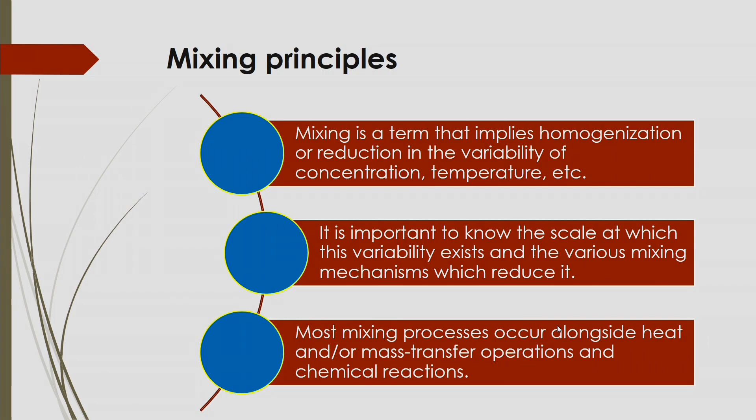So that is why you can say that mixing is one of the important hydrodynamic phenomena in any chemical engineering processes where multi-phase flow systems are taking part in that particular process. Now, in any chemical engineering process, you have to use some reactor where the reactions will be carried out.

So reactor engineering starts with a simple mass balance where your reactions will be carried out. Suppose there is a reaction: what should be the inlet to the reactor, and is there any generation or consumption of the reactants that are allowed to pass into the reactor? The inlet and the generation plus consumption should be balanced by the outlet stream and the accumulation, if there is any in the process.

So here the amount of inlet, and generation plus consumption: is any product generated, or are any reactants consumed? You have to take those terms into account, and also measure the amount of stream coming out, and whether there is any accumulation.

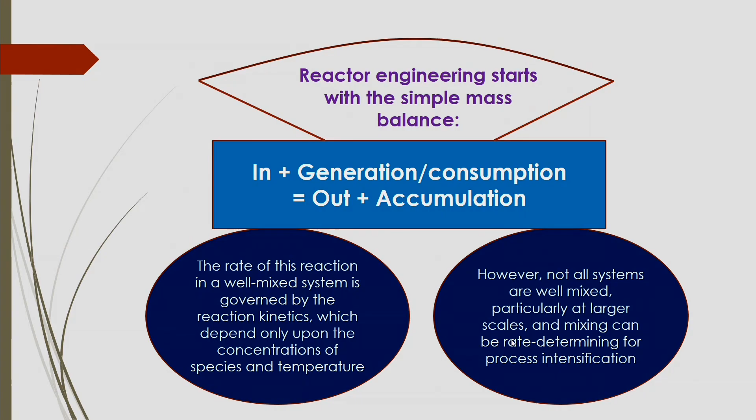If three-dimensional mixing is there, at least in two dimensions you can reduce the back mixing. So you have to design the system in such a way that you can optimize the mixing phenomena. Also, in fluidization operations, gas-solid reactions are there where adsorption is going on at the solid surface.

If you design the system in such a way that there will be back mixing of the solid particles, there may be less performance of the mass transfer from the gaseous stream to the solid stream, because the adsorbent solid particles get back to the original position or circulated, so due to pressure differences desorption as well as adsorption may happen simultaneously. So there may be hindering of the performance of the mass transfer.

Another important task for the designer is the prediction of the degree of mixing and the residence time of the species in the vessel. Certain reactions depend on the residence time of the reactants, so you have to design the system such that for a certain degree of mixing, you can predict or estimate the residence time of the reactants. By generating models you can predict the degree of mixing and residence time, and there are several methods to estimate the degree of mixing, like the tracer technique and other techniques.

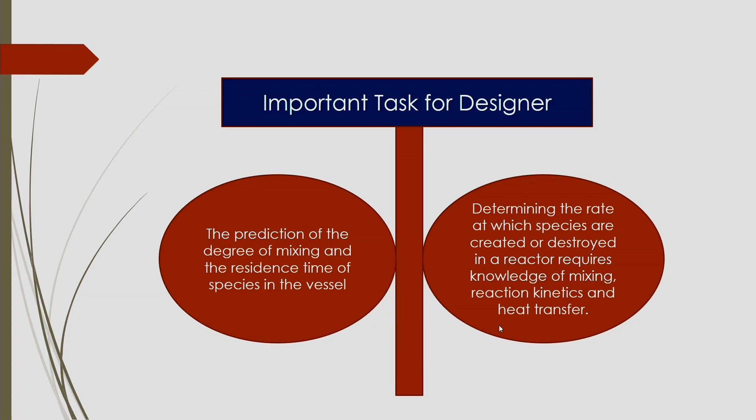This can be calculated based on the degree of mixing. If you have more mixing, you will automatically get a different value of activation energy and the rate constant of reaction. So these are the important criteria for the designer to develop systems based on these mixing characteristics for process intensification.

Designers nowadays are procuring different devices based on these mixing characteristics, and they are trying to reduce the size of the reactor. So reduction in scale is one of the important aspects for process intensification. Now, what happens when the scale is reduced for process intensification?

The reduction in scale implied by intensification has many desirable consequences for chemical engineering operations, like lower mass and heat transfer resistance enabled by the reduction of path lengths of the diffusion or conduction interfaces. So if you make a system such as a micro-channel based reactor, the path lengths may be very small for diffusion or conduction through the interfaces.

So in that case you can get lower mass and heat transfer resistances, so that the performance of the mass transfer operation and heat transfer operation will be enhanced. Also important is coupling with more intense fluid dynamics in active enhancement equipment, where based on mixing phenomena you can intensify the equipment.

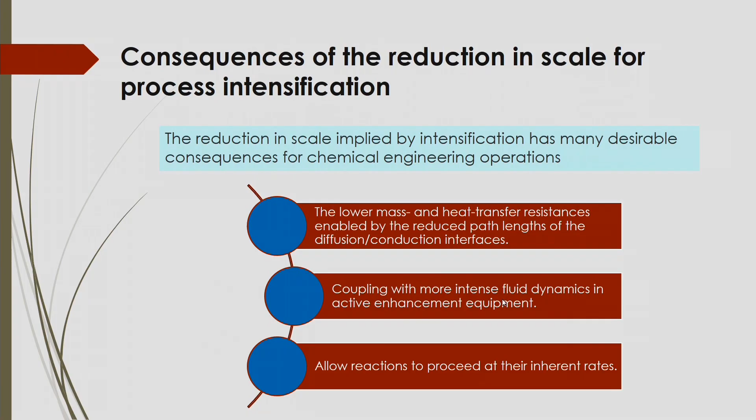Also, sometimes you reduce the scale of the system, such as getting contact of the gas liquid system in micro channel systems where gas and liquid flows occur. You can get more contact, more thin films between gas and liquid.

This gives more reactions at the interface, and you get more reactive mass transfer in the particular chemical engineering process. This can be produced just by the inherent properties to get a more reactive system or mass transfer system by reducing the scale of the unit.

Also, residence time distribution may be substituted for the hour scale processing times associated with large conventional batch operations, which will be beneficial with consequences for energy consumption and process safety.

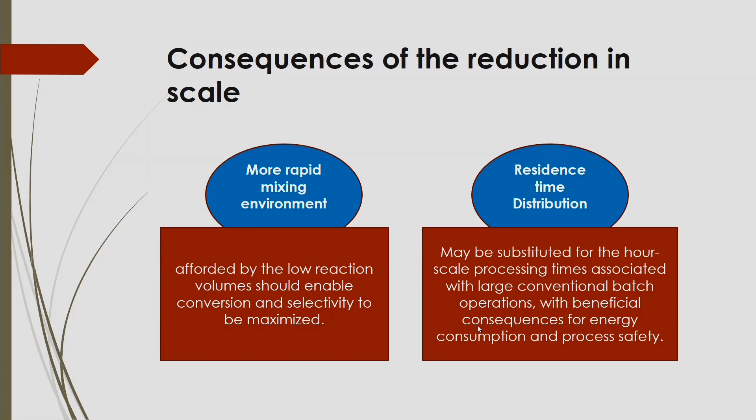Now the main question is why to learn about this mixing phenomena. Basically, understanding of the mixing is desired for the purpose of optimized operation and design of industrial scale reactors.

Also, in many cases there are simultaneously several competitive reactions that occur, and in that case the time scale of the mixing process as well as the degree of mixing are very important factors to give you competitive reaction phenomena and an optimized system to develop that particular reaction system.

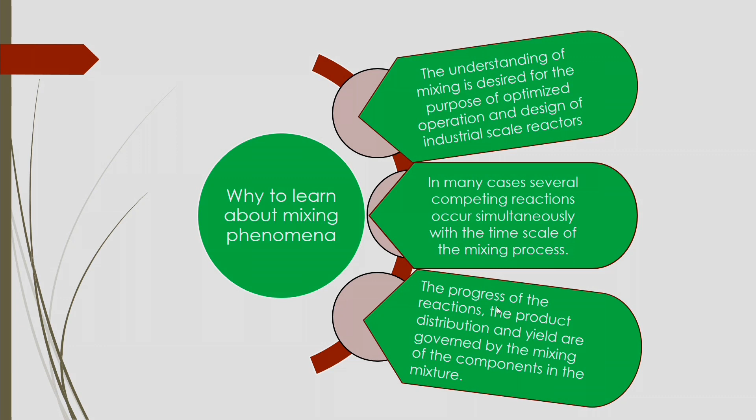The progress of the reactions, the product distribution and yield are governed by the mixing of the components in the mixture - this is a very important aspect where knowledge of mixing is essential, to know how reactions progress and how products are distributed and yield based on this mixing phenomena.

Also, you can control the degree of reactions, extent of reactions, or extent of mass transfer or heat transfer by controlling the rate of mixing. In that case, it is possible to intensify the process to get a better yield.

Generally, mixing time is one of the most important hydrodynamic parameters in different types of chemical engineering reactors for their design and the scale up of the unit and process.

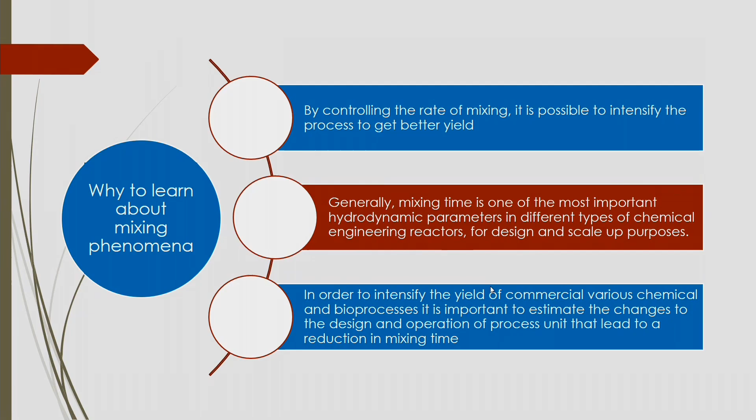To intensify the yield of commercial chemical and bioprocesses, it is important to calculate or estimate the changes to design and operation of the process unit that lead to a reduction in mixing time. You have to design the operating unit in such a way that the yield of the reactions is optimized based on this reduction in mixing time.

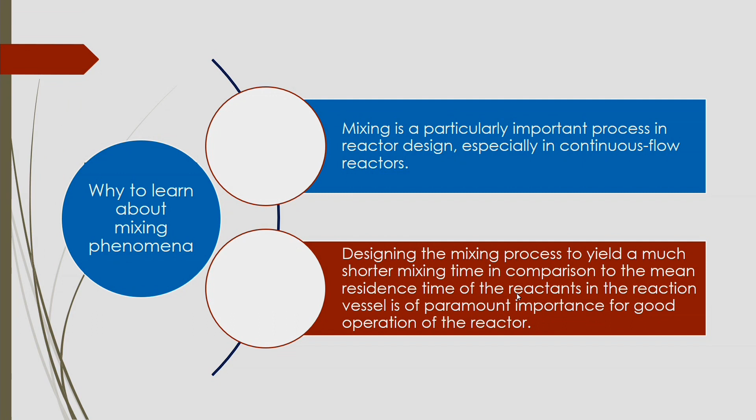Mixing is a particularly important process in reactor design, especially in continuous flow reactors. Designing the mixing process to yield a much shorter mixing time compared to the mean residence time of the reactants in the reaction vessel is of paramount importance for good reactor operation. We need to know the mixing phenomena for reactor design so that reaction kinetics, reactive mass transfer, and heat transfer can be optimized.

Now, what are the factors that affect the mixing time? Generally, there are several variables that affect mixing time or degree of mixing, and we can categorize these variables into four types.

The first type is dynamic variables. Flow rate is called a dynamic variable. If you increase the flow rate, you can get more mixing, and in that case there may be back mixing or internal circulation of the fluid, so you get more residence time of the fluid particles. So dynamic variables like flow rate are one of the important factors.

Then there are geometric variables, such as the size of the reactor being used, and if you're using catalyst particles for a particular reaction, what should be the size of those particles. If you reduce the size of the particles, you get more interfacial area, and then you get more mass transfer.

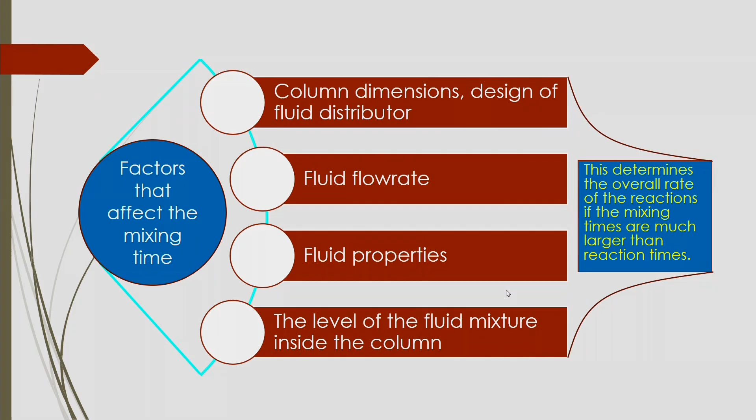Now this determines the overall rate of the reactions. If the mixing times and the degree of mixing are much larger than the reaction times, the overall rate of reaction will be based on these factors that are affecting the mixing time as well as the degree of mixing.

Now, let us consider some phenomena for the slow reactions and the fast reactions. For a very slow chemical reaction, that is relative to the time scale for mixing of the reactants, the extent of reaction is determined by the reaction kinetics and the stoichiometric proportions of the reactants.

And when the reaction is relatively fast, in that case mixing rate, physical factors like sparging design, column diameter, rate of stirring, solvent viscosity, that is different dynamic, geometric, physical property variables, and also some other variables are there. Sometimes thermodynamic variables are also important, pressure and temperature. So those factors will be considered for these fast reactions to optimize the reaction.

And the intense mass transfer and micro mixing capability of the rotating packed bed provides the environment to reduce the reaction time 4 to 10-fold compared to the stirred tank reactors. That is why, for process intensification, micro mixing or micro reactors are being developed, because they give higher mass transfer.

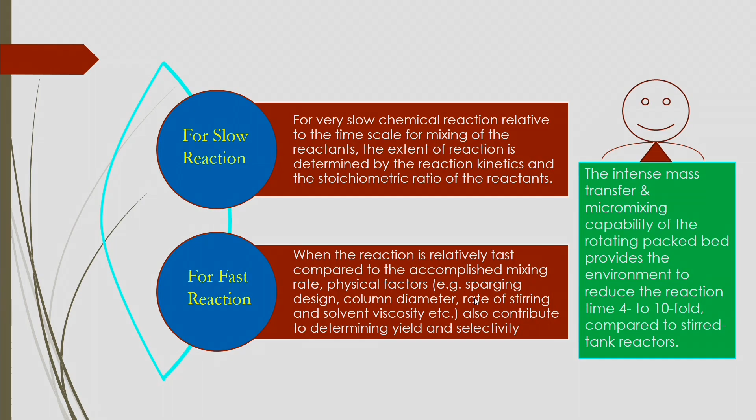Of course, every reactor has some pros and cons. Sometimes stirred tank reactors will be easier to operate, whereas a rotating packed bed may not be easier to operate, and also the investment cost will be higher compared to the stirred tank reactors.

Now you have to remember that in order to exert full control over the progress of a chemical reaction or physical transformation, the fluid dynamic environment must be sufficiently intense so that the mixing and the heat transfer rates are faster than the intrinsic chemical kinetics. So you have to remember this control over the reacting system based on the mixing phenomena.

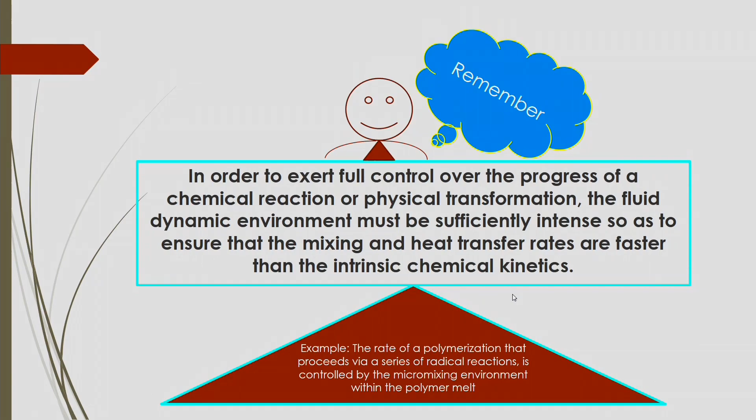For example, the rate of polymerization that happens via a series of radical reactions can be controlled by the micro mixing environment within the polymer melt. So this is one of the important examples where you can control the polymerization reaction based on the micro mixing environment.

Now the influence of mixing and the reaction rates on the reactor behavior, how slow mixing affects the progress of reaction, is represented in this simple diagram. There is a reaction A plus B which gives C, with the reactants A and B traveling in plug flow along a tubular reactor. In this slow mixing there will be interdiffusion between A and B, which is very slow compared to the reaction rate. Then C is produced near the original plane of A and B separation.

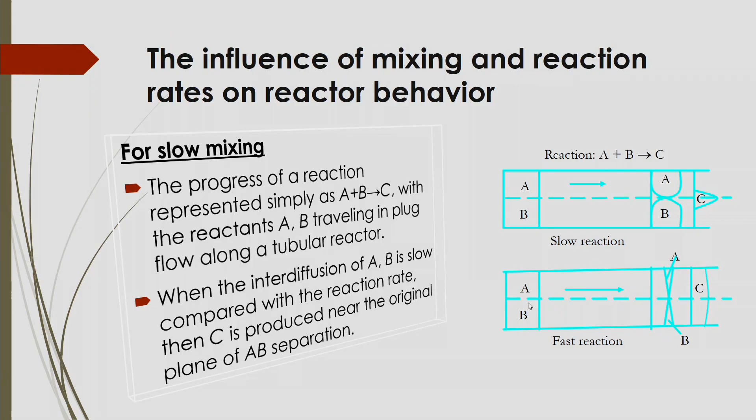So for the slow reactions, the progress of reaction is represented by this A plus B to C reaction, where reactants A and B travel in a plug flow or tubular reactor. So in that case micro channel based reactors for process intensification are important. The interdiffusion of A and B is very slow compared to the reaction rate. And if the mixing is slow, large and varying concentration gradients of the reactant species will exist in different parts of the reactor.

So that is also to be remembered, how you are optimizing the system based on this mixing, whether it is slow or fast. This results in wide variations in the product concentrations and properties that may be deemed off spec in many applications. So you have to remember whether the mixing is slow or fast.

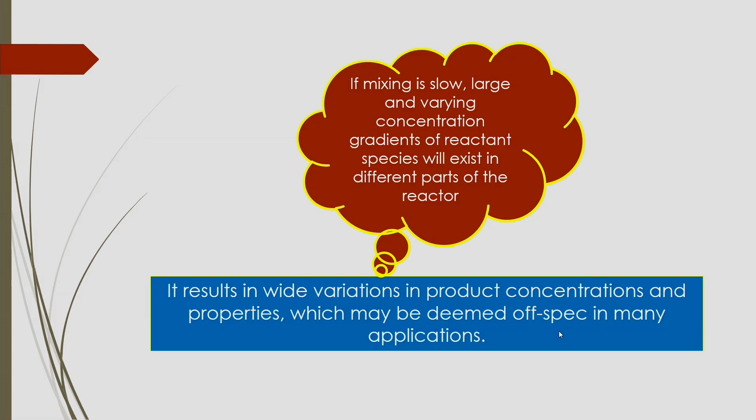According to that, you have to intensify the process and also develop the process unit. And slow mixing represents a total loss of control on two counts. One is that, suppose there is an AB reaction, the AB stoichiometric ratio will vary wildly across the reactor diameter. Therefore, the selectivity for the desired product C is likely to be compromised, because a more realistic reaction scheme will usually include many side reactions.

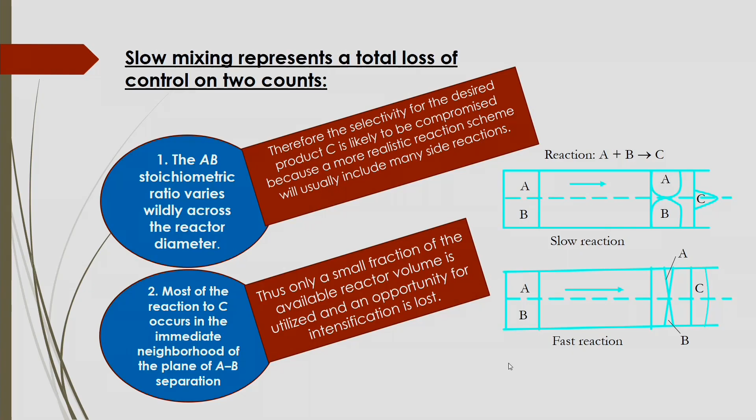Another point is that most of the reaction that gives you C occurs in the immediate neighborhood of the plane of A and B separation, as shown here in the figure. Hence only a small fraction of the available reactor volume will be utilized, and an opportunity for intensification will be lost. So these are the two counts to be remembered for slow mixing, for the total loss of control.

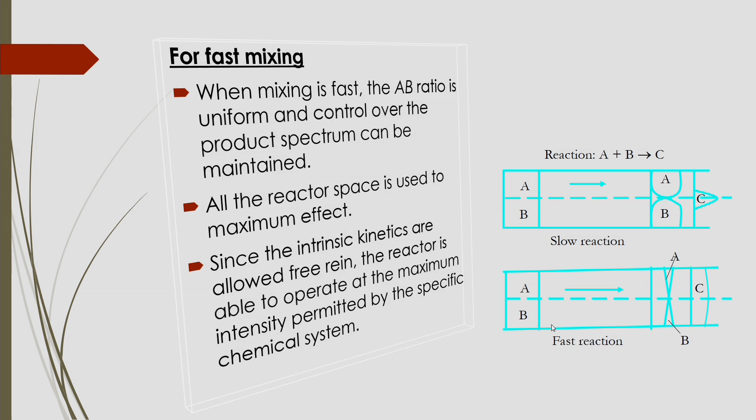For fast mixing, when the mixing is so fast, the AB ratio should be uniform and there should be control over the product spectrum. Also the reactor space should be used to maximize this effect, and intrinsic kinetics should be allowed free rein, where the reactor is able to operate at the maximum intensity permitted by the specific chemical system.

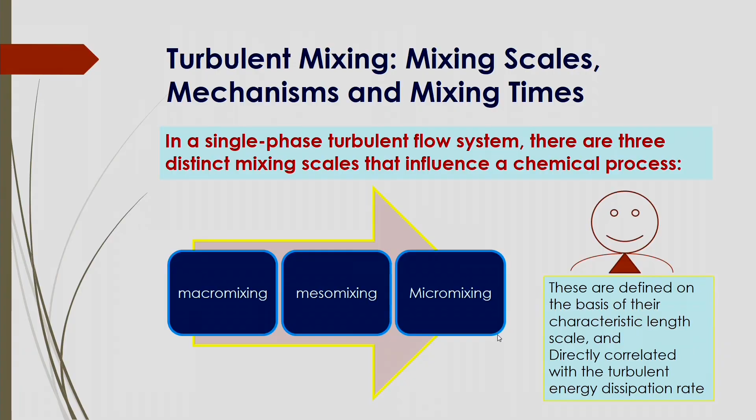Now, let's go to the different mixing mechanisms, like turbulent mixing scales and mixing times. In single phase turbulent flow systems, there are three distinct mixing scales that influence a chemical process: macro mixing, meso mixing and micro mixing. These three mixing scales are generally considered for the intensification of chemical processes. They are defined on the basis of their characteristic length and directly related to the turbulent energy dissipation rate. So, based on the energy dissipation under turbulent conditions, you can optimize the mixing characteristics.

That is why sometimes in a reactor some provisions are made to get intense mixing inside the fluid based on turbulent flow. If you are supplying the inlet streams at a high flow rate, and using provisions like baffles and cross baffles inside the reactor, or nowadays helical coil systems, and inside those helical coils some nozzles that obstruct the flow, then at high flow rate, whenever the fluid goes through these helical or baffle systems, there will be intense shear stress inside the reactor.

Based on that intense shear stress and high energy dissipation inside the reactor, the fluid gets more turbulent, and because of that there will be higher energy distribution and dissipation and more mixing inside the reactor. The path of fluid mixing may also change by providing these baffles, nozzles or obstructions inside the reactor, so that the mixing times may be higher or lower based on the design.

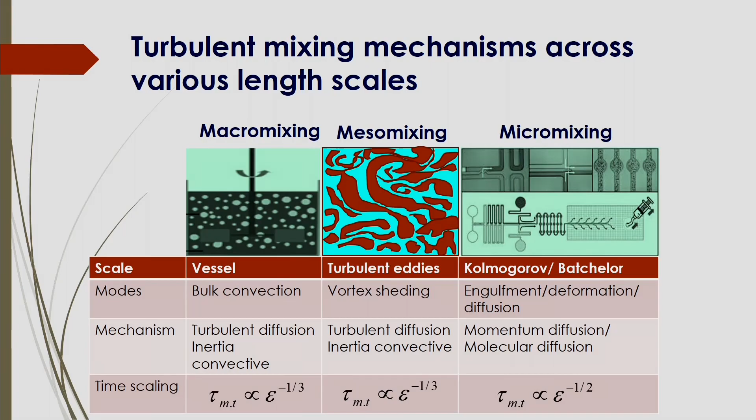And if you consider the time scale, what time will be required for macro mixing? For macro mixing, the degree of mixing will be directly related to the energy dissipation, whereas mixing time will be inversely related to the energy dissipation. If you consider epsilon as energy dissipation, for macro mixing the time of mixing will be proportional to epsilon to the power minus 1/3, whereas for turbulent eddies it will be the same, proportional to the inverse of the cubic root of the energy dissipation. Similarly, for micro mixing, the mixing time is inversely proportional to the square root of the energy dissipation. So based on this, you can see how the time scales of macro, meso and micro mixing depend on energy dissipation.

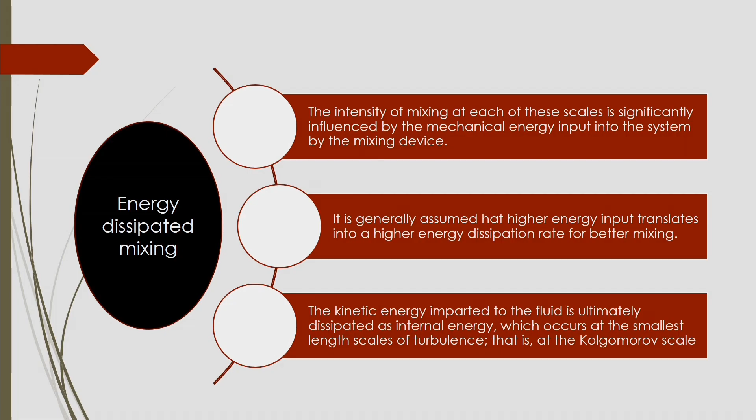Now, energy dissipation and mixing: the intensity of mixing at each of these scales, macro, meso or micro, is significantly influenced by the mechanical energy input into the system by the mixing device, and it is generally assumed that higher energy input translates into a higher energy dissipation rate for better mixing. The kinetic energy imparted to the fluid is ultimately dissipated as internal energy, which occurs at the smallest length scales of turbulence, and that gives the time scale represented by the Kolmogorov time scale.

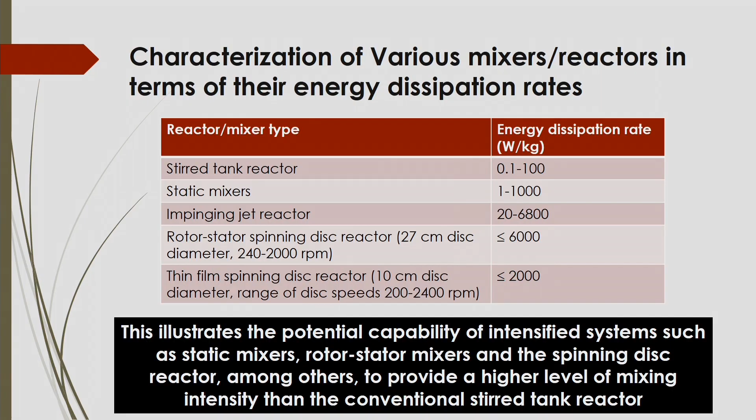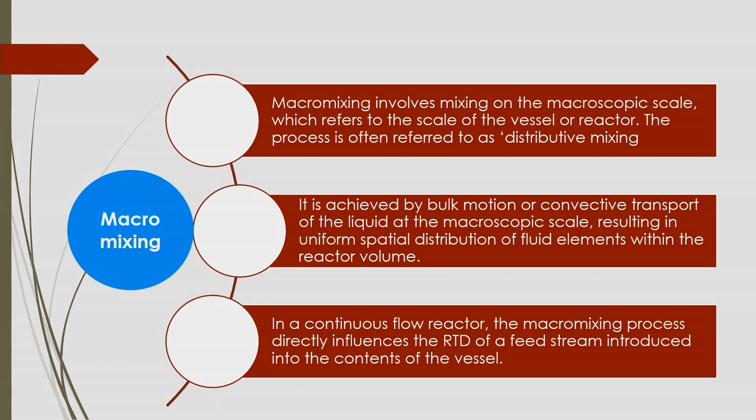Macro mixing involves mixing on the macroscopic scale, which refers to the scale of the vessel or reactor. The process is often referred to as distributive mixing, and it is achieved by bulk motion of the fluid elements transported by the liquid at the macroscopic scale, resulting in uniform spatial distribution of the fluid elements across the reactor volume. In a continuous flow reactor, the macro mixing process directly influences the residence time distribution of the feed stream introduced into the reactor.

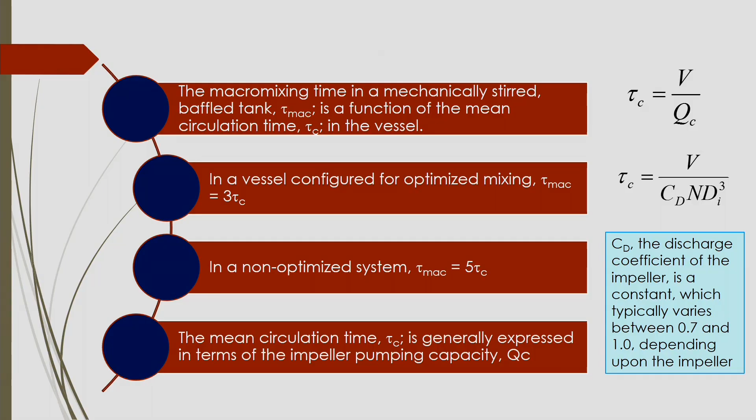CD is the discharge coefficient of the impeller if it is being used for the stirred tank reactor, and it is a constant which typically varies between 0.7 and 1, depending on the impeller design. In non-optimized systems, this macro mixing time should be 5 times that circulation time, and the mean circulation time is generally expressed in terms of the impeller pumping capacity also, denoted by QC here.

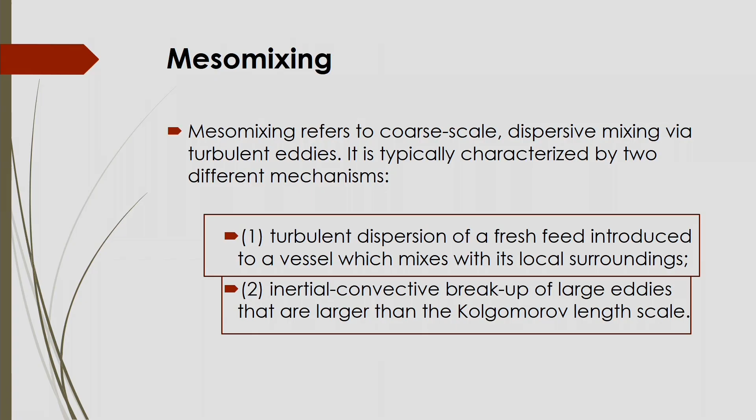Meso mixing refers to coarse scale and dispersive mixing via turbulent eddies; those eddies randomly move inside the reactor, and it is characterized by 2 different mechanisms. One is turbulent dispersion of the fresh feed introduced to a vessel, which mixes with its local surroundings, and the other is inertial convective breakup of the large eddies.

Sometimes you use different provisions so that eddies are broken up into smaller eddies, and then you get a very small scale of interaction of these 2 eddies, and then you can enhance the meso mixing. The characteristic time scale associated with the turbulent dispersion is denoted by the meso mixing dispersion time scale. It is represented by tau d, and it can be defined by QF by UD turbulent.

Here, if R pipe is much less than LD, where LD is the dispersion length, the characteristic length scale of the dispersion, and R is the pipe radius. D turbulent is the dispersion coefficient of the turbulent medium. So tau D will be R square pipe by D turbulent if the radius of the pipe is almost equal to the characteristic length, or if it is greater than the characteristic length, you can define it by this equation here.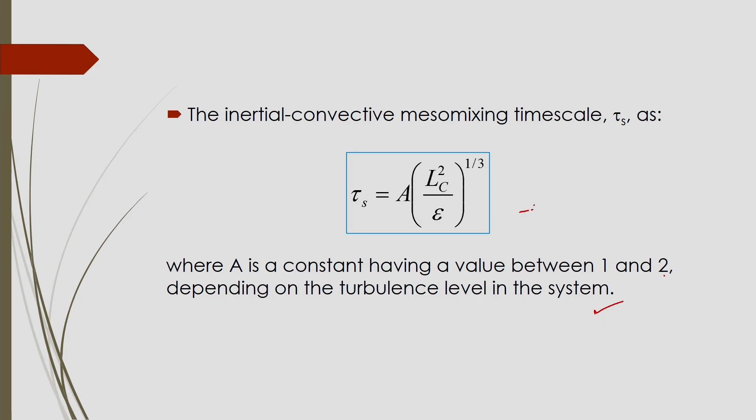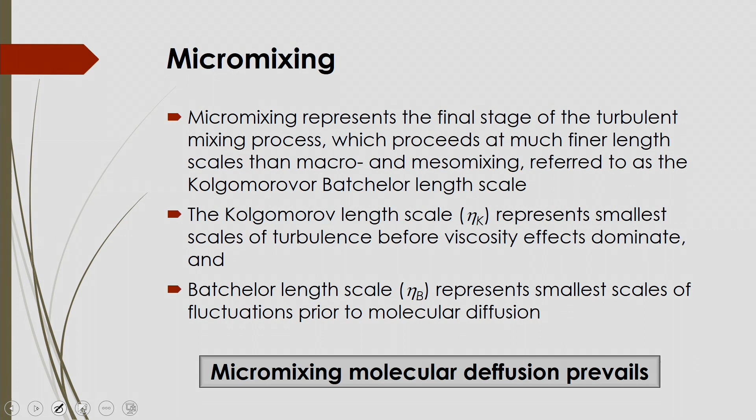Then micro mixing represents the final stage of the turbulent mixing process, which proceeds at finer length scales than macro or meso mixing, referred to as the Kolmogorov or Batchelor length scale. The Kolmogorov length scale represents the smallest scale of turbulence before viscosity effects dominate, and the Batchelor length scale, denoted by eta B, represents the smallest scale of fluctuations prior to molecular diffusion. So in micro mixing, molecular diffusion prevails.

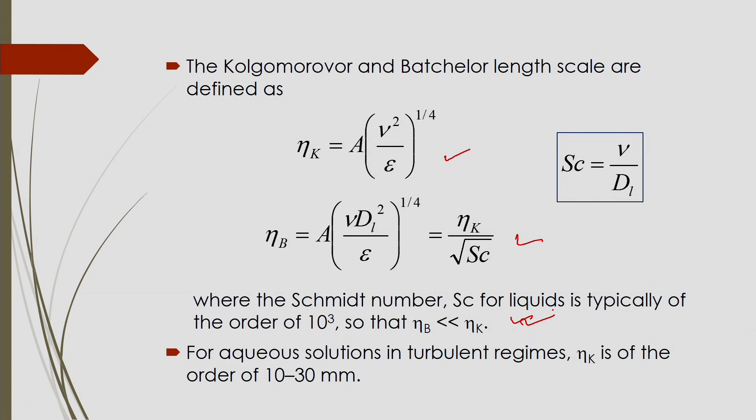The Kolmogorov and Batchelor length scales can be defined by the equations given here, eta k and eta b, where the Schmidt number Sc for liquids is typically of the order of 10 to the power 3. So eta b should be much less than eta k. For aqueous solutions in turbulent regimes, eta k is of the order of 10 to 30 micrometers. So, based on this length scale criteria of micro mixing, devices are developed for getting more mass transfer and heat transfer in the systems.

I think I have covered some process intensification phenomena based on these mixing characteristics. This lecture will be helpful for process intensification where you are considering the design of micro reactors or other reactors based on this time scale. For further reading, I am suggesting the textbook to follow, and from the next lecture onward we will discuss more about process intensification based on other characteristics.